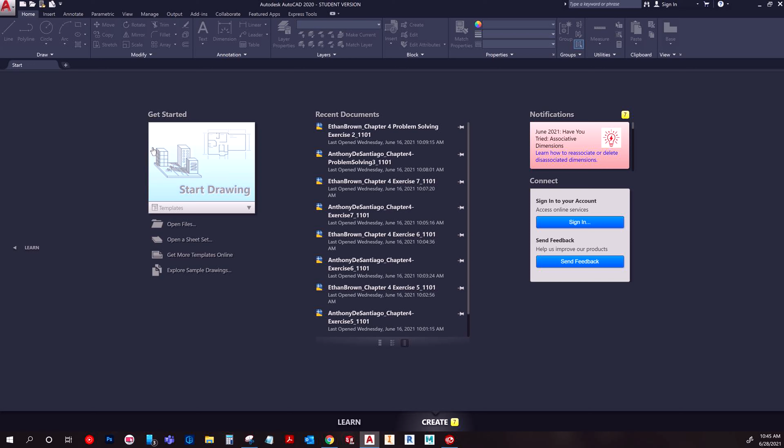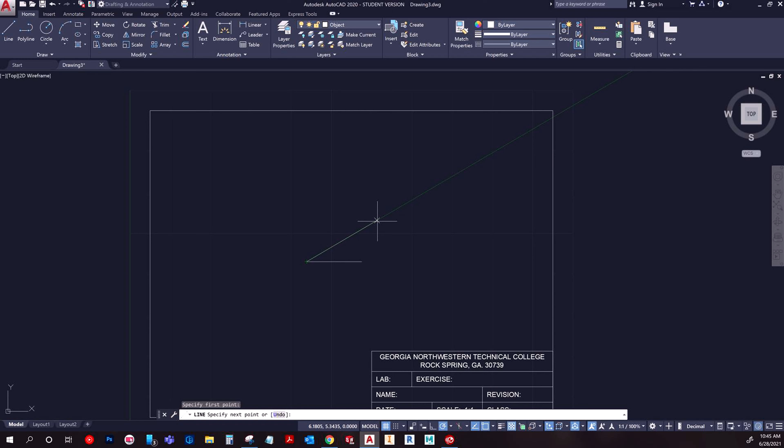So first things first, you have a very basic, I guess kind of hourglass shape you're going to draw, and I'm just going to roughly show how it'll look. Turn on ortho mode, draw a horizontal line, and then I've already goofed because we're actually coming from this end. So I'm going to start another line, and then I'm going to make sure it's aligned to this end point. And I'll do the same here, turning ortho back on, and then finally connecting it.

So from here, it has used the erase tool. Now, me personally, I would just rather select the item and hit delete on the keyboard, but I guess it's kind of cool if you do like using the erase tool to use this. You hit erase, type in last, hit enter. And as you notice, it kind of pre-selects that item there. So then I think I just hit enter and it deletes it.

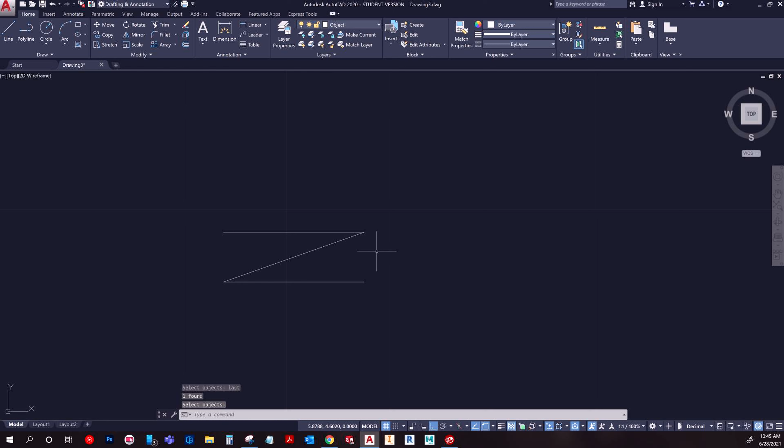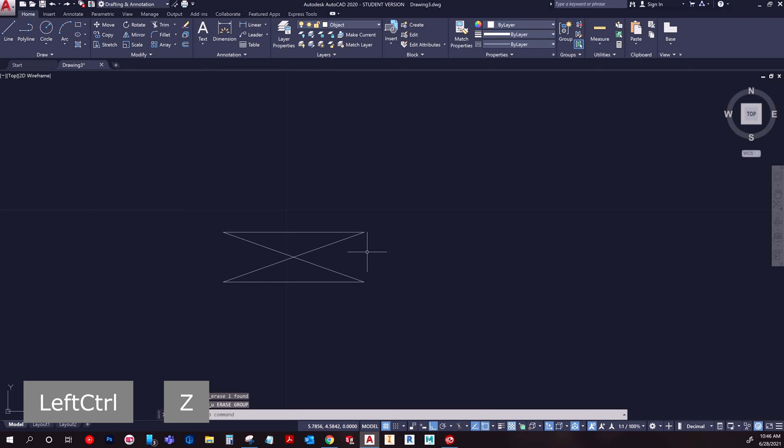Yeah. So what it wants you to do is do the erase command again, type in last, hit enter, and there you go. Finally, one more time, type in erase, last, and go. Which that's fine. You can also choose erase from here, and that works. You could do the same up here. You don't have to do the last thing. But to me, if you're going to delete everything, it's just going to be quicker to select it and hit delete on the keyboard. Pretty straightforward, a lot quicker. So that's what I would advise.

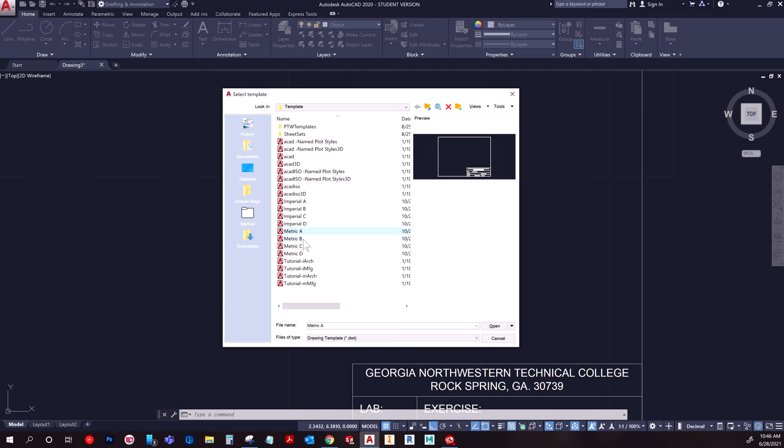And then up next, let's see, is exercise 4, which is going to be on page 511. And that's going to be a metric template. So I'm going to whip out a metric B here. And let's start with that middle circle. Most of the stuff is in diameter, so let's see, where do I want to draw? Let's do about right here. So let's do 200, 150. You can see the coordinates down here, by the way, if you're ever curious where I get these ideas from. It's 200, 150. And then the size is going to be 20.

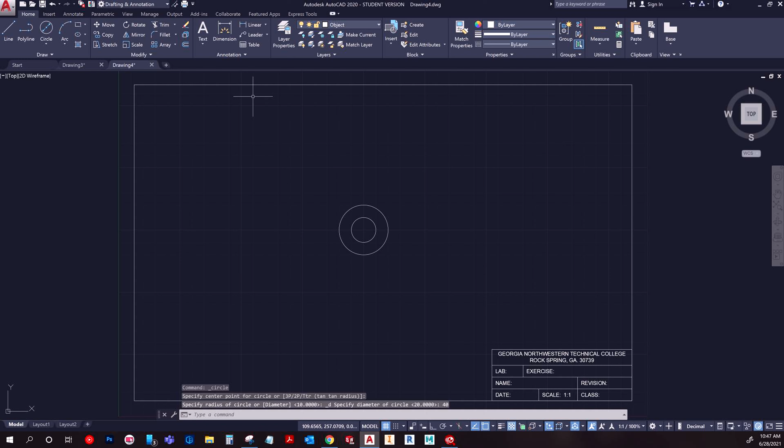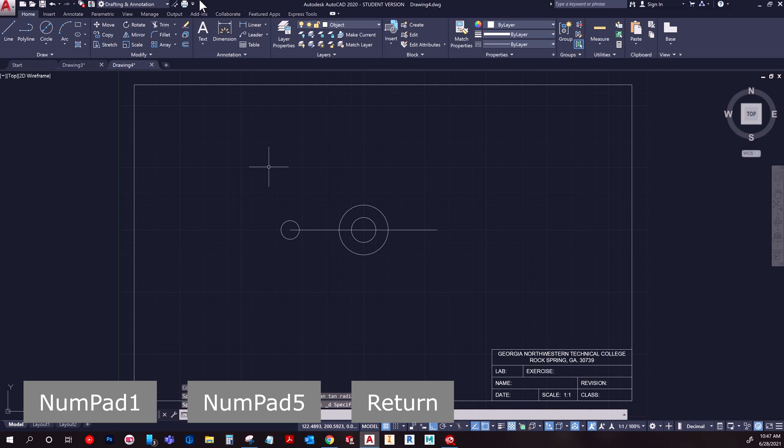We have another one that's going to be concentric to it, which will be 40. And then let's see here. So we have 60 from the center over. So I'm going to hit F8 to turn ortho on. And I'm just going to draw some projection lines both ways. It's 120 overall, so that means it's 60 on each side. And we will have some circles that are 15 diameter and 30. Whoop. That was 300, so.

Okay, so now I could go ahead and draw the same, but I'm just going to copy. So I will choose the center point after I selected them, choose the end point, hit escape, and then we can delete these lines.

Okay, so this part's a little tricky. I've talked about it in a few other solution videos, but in order to draw lines tangent on both sides, make sure you deselect in your snap options everything but tangent for this part. And then when you do that, you will get these tangent suggestions, and you're going to just basically snap to them as you go. So I'm just going to click each, hit escape, click, escape, click. And that's pretty much it.

So we can go ahead and add in our center marks. Go ahead and flip to the annotate tab. And make sure you always choose the largest center mark. The reason for that is if you don't, you end up with this really tiny thing. So if I delete this for a minute, you can see it. It doesn't match the book. Basically the idea, oh no, went too far. Basically the idea is you always want the biggest circle because it encapsulates the part shape best. So keep that in mind.

And then let's see, I'm trying to think, is this required at this point? I don't think you have to detail yet. Let's see here. So detailing is not quite required yet. It is encouraged, so I won't bore you with dimensioning all of this, but it is pretty straightforward.